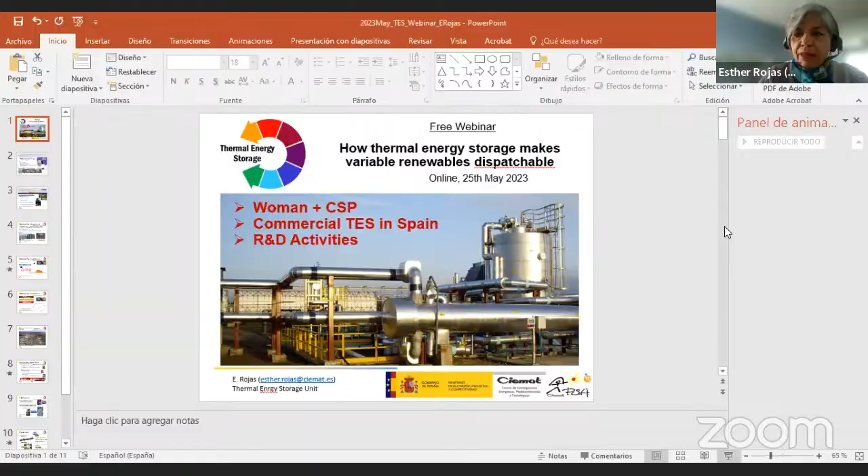here we are. So as Cristina has introduced me previously, I'm going to talk a little bit about what Women Plus Concentrating Solar Power is, and a very brief overview of what the technology at the commercial level on thermal energy storage systems is in Spain, and what are the activities involved in terms of research, development, and innovation.

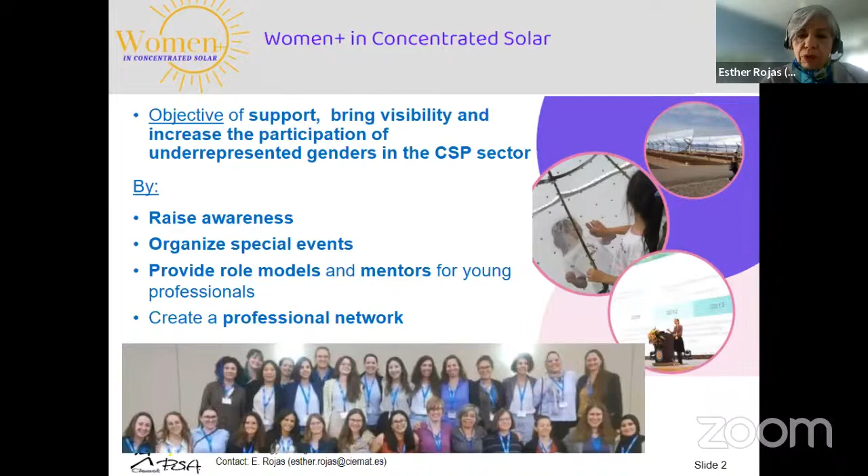Organizing specific events like this one in collaboration with the great support of ATA in this case, and also providing role models and mentors for young professionals. We think that having a reference, a woman reference, sometimes makes things easier for people to be aware of the role that we can play in this technology, and also creating and enlarging our professional network within this sector.

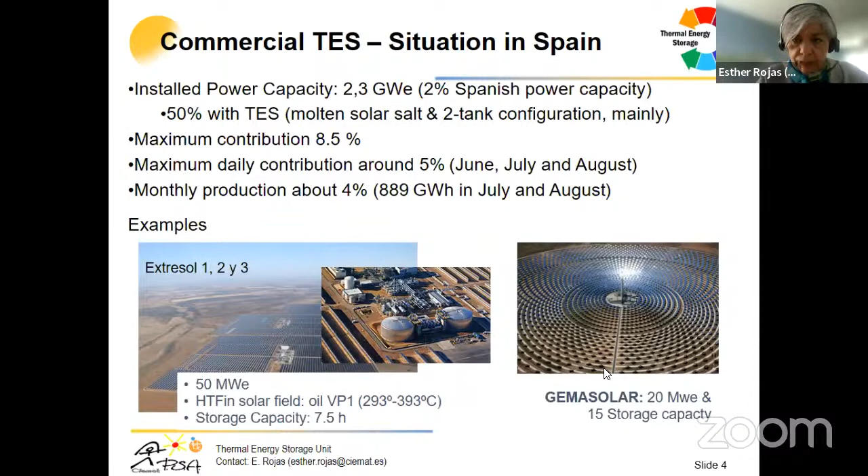And I don't know why it happened, I cannot move on. Sorry, I'm trying to move on, but I can't. It seems the slide is stuck. Yeah. Okay. So now here we are.

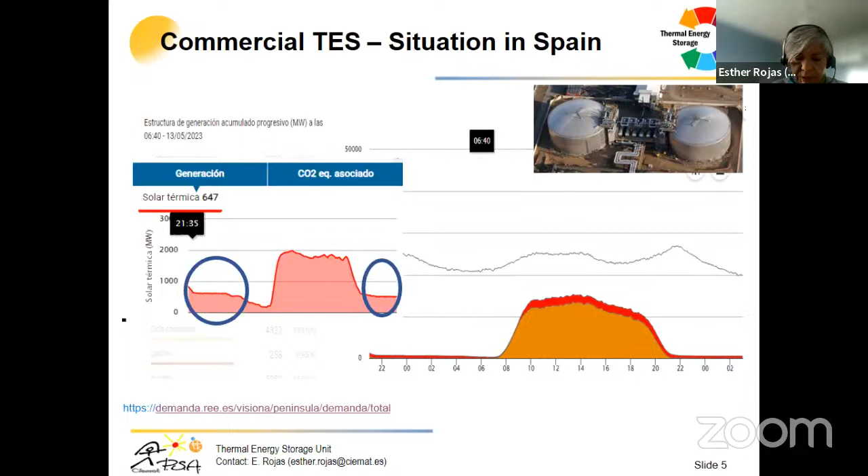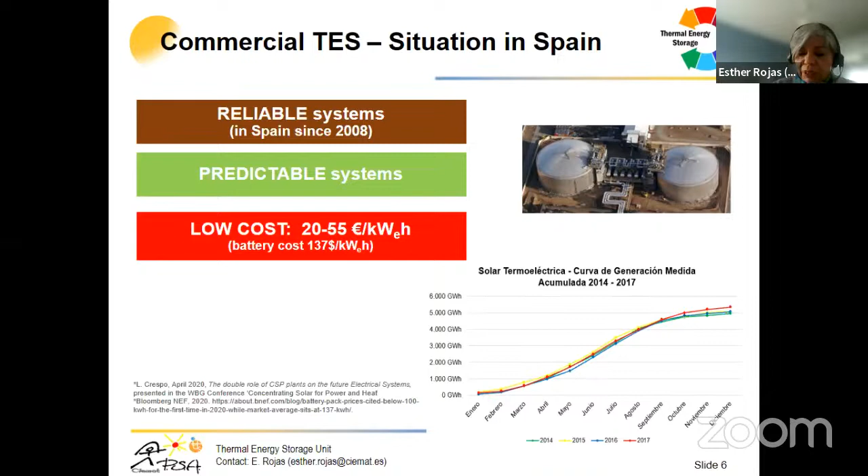This is in relation to the commercial systems that are quite well developed, not only in Spain. We will see more cases and more things in other countries. What I'm doing in relation to thermal storage systems: I have to say, Cristina introduced it a little bit before, that I work for the Plataforma Solar de Almería, which is very well known in the concentrating solar technology world, since it's one of the most complete testing installations worldwide for this technology. And it belongs to CIEMAT.

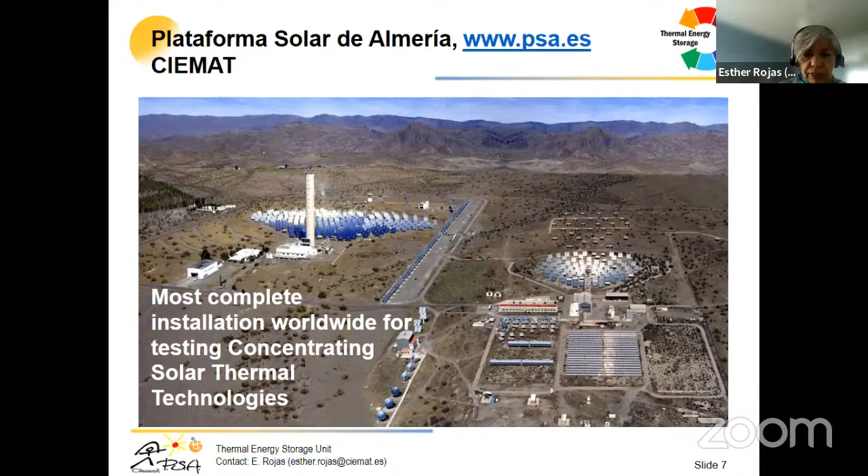And there is a research unit where we have experience in simulating thermal storage systems, and also, sorry, stuck again. And also we work with the evaluation of materials, components, and equipment. So in the end, our experience is in the design optimization of thermal storage systems, where I'm involved in the simulation part, and also in the evaluation and characterization of prototypes and experimental campaigns.

I would like to just briefly go into some details about modeling. I work on developing models for thermoclines and packed beds, with the objective of having predictive numerical models. There are a lot of simulation models, but none of them, as far as I know, are predictive. They always have to be adjusted after the prototype of the system has been erected. And also working on much simpler models, we call them analytical models, able to be integrated in a whole plant model where computing time is important. So they are easy to handle.

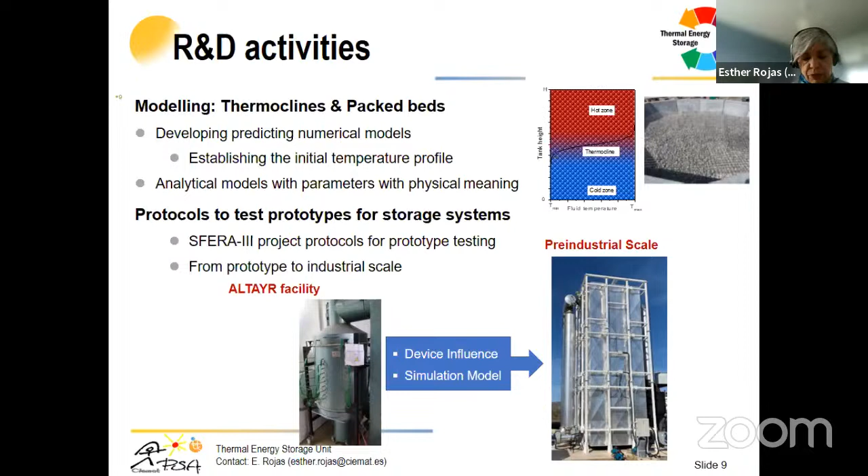As mentioned before, I also work on prototype testing, in the sense of evaluating the experimental results, and trying to optimize the protocols developed in the SFERA-III project for testing prototypes. And also we are quite interested in how we can transfer or extrapolate the results at the prototype level to the industrial scale.

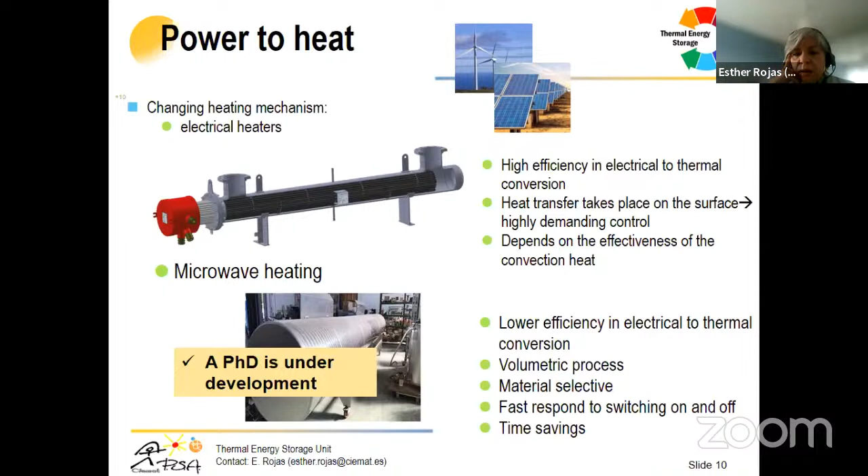Finally, I would like to mention that I'm also involved in power-to-heat-to-power using thermal energy storage systems, a kind of conversion between electrical energy and heat energy. Normally it is made by electrical heaters, and we are exploring the possibility of using microwaves for such heating. I'm co-directing a PhD student on this topic. And that's it. Thank you very much for your attention.

Thank you, Esther, so much for that overview of what's happening right now in Spain, and for giving more visibility to women in CSP. I have a question regarding Women in CSP; we left the website in case anyone wants to check it out. Can only women register, or can men also? No, anybody can be there, of course, be aware of what we are doing and participate and collaborate. So it's not only for women, but if we want to make women or underrepresented genders visible, when organizing things our tendency will be to promote these people. But of course, anybody can be a member of our community.

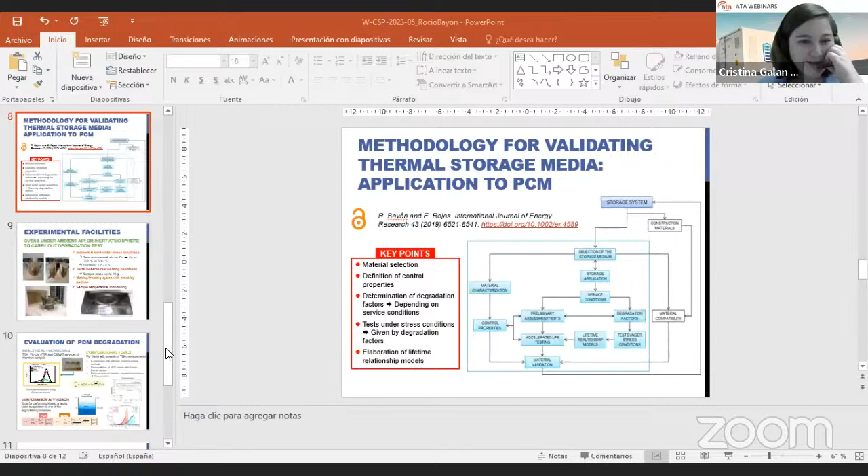Rocío, good morning. I can't see you. Can you hear me? Yes, here I am. There she is. Perfect. So I'm sharing my screen. Can you see my screen? Yes, it's not in presentation mode, but we do see it. I'm going to put it as presentation. Can you see it now? Right now we can, yes. Let's check if it goes ahead. It does.

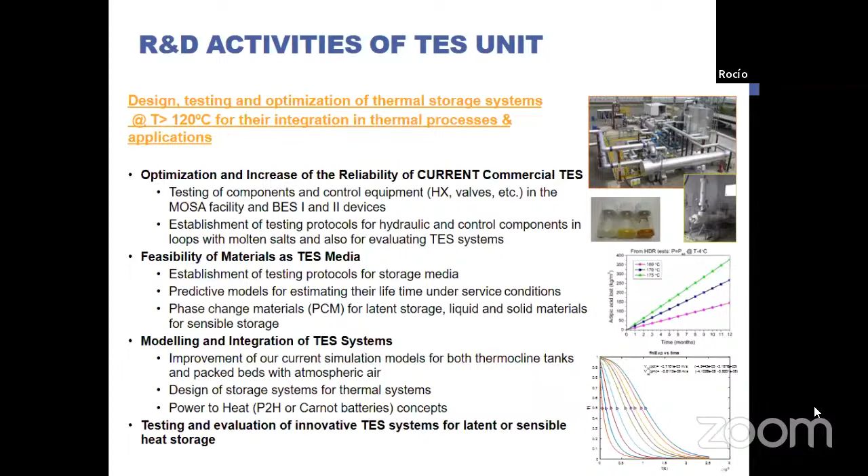And we have another project which is more focused on PCM studies, which is the STIS4D, a national project. And we also recently got two more projects, Infotherm and Mosaico. Infotherm is for calibrating systems for testing thermometric measurements using optical fibers. And Mosaico is another project more devoted to dissemination of the results obtained in the SolarPACES task in relation to components testing for installations of molten salts.

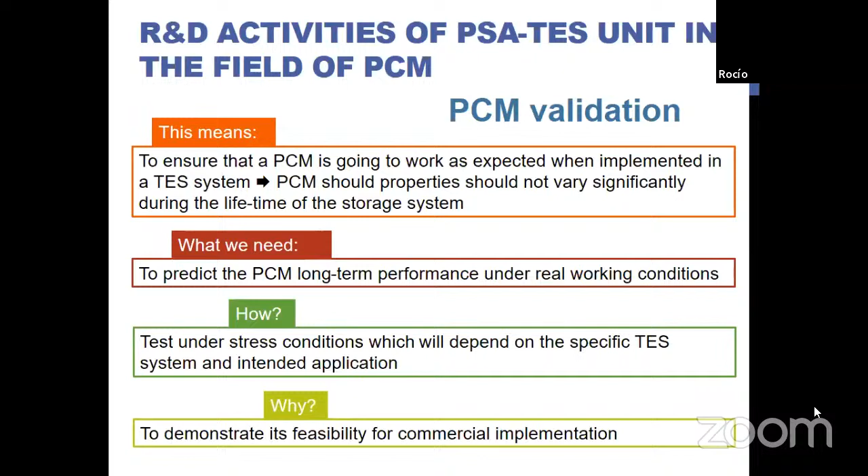And why do we need to do this? Because we want to demonstrate the feasibility of the material for commercial implementation. We have to be sure that the material we are choosing is going to work as we want. So for doing this activity, we already presented or developed a methodology that you can check in this paper, which is open access, if you want to read about it more in depth.

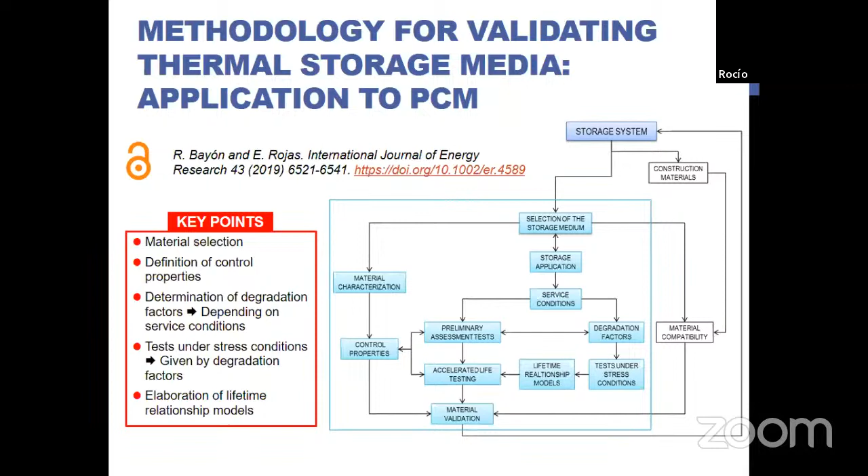I'm not going to explain it here, but the key points are, first of all, we have to determine which degradation factors can affect our PCM material, and this will depend on service conditions. The tests we have to perform under stress conditions will be given by the degradation factors. And in the end, we need to elaborate lifetime models that will help us predict the behavior in the future and the long-term performance.

What we have for doing this in our labs are, for example, ovens that can work in ambient air or inert atmosphere to carry out these degradation tests. So we can perform isothermal tests under stress conditions. It depends on the oven, but we can reach temperatures up to 350 or 500 degrees. The duration of the tests is normally between 1 hour and 6 hours.

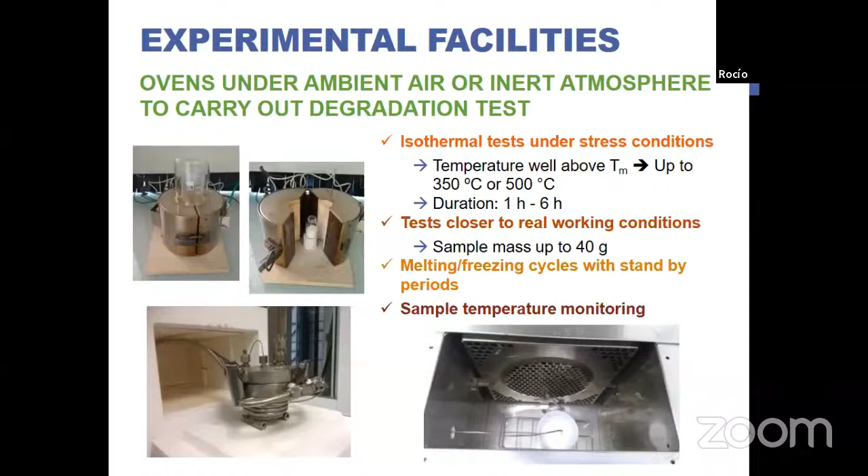The idea is to perform tests as close as possible to real working conditions, which means samples up to 40 grams. Of course, real conditions require much more mass, but for the lab, I think 40 grams is quite okay. In some of these ovens we can also perform melting-freezing cycles with standby periods, and we can also do sample temperature monitoring.

For this evaluation of degradation we can also apply different analytical techniques, for example, thermogravimetric analysis, UV-vis spectroscopy, FTIR spectroscopy. And at CIEMAT in general we have many services for chemical analysis, because if we want to study the degradation of a material, we need to analyze what happens to the material.

We also have computational tools for the kinetic analysis of thermogravimetric measurements. With these tools, we can estimate the kinetic triplet, which is the activation energy, the pre-exponential factor, and the reaction mechanism of this degradation process. We can also do the deconvolution of DTG curves with Fraser-Suzuki curves. You have here a couple of examples of the results we can get.

We have also developed an evaporation approach, because sometimes the degradation process of PCMs is evaporation. So we have developed tools for performing the kinetic analysis when evaporation is one of these degradation processes, either for TGA measurements or for the oven results.

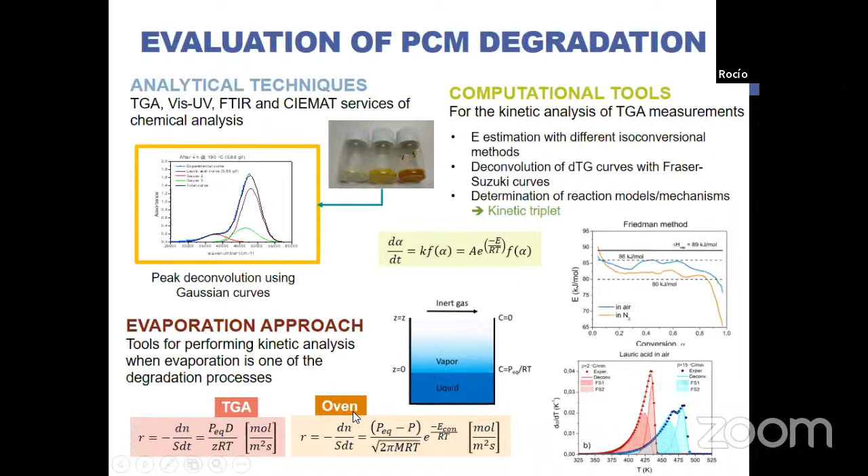Okay. So just to show you, before finishing, some results that we obtained for two different kinds of fatty acids that are normally considered as phase change materials. In the end, what we want to do with all these studies is to predict the mass loss over time due to evaporation, because these acids undergo evaporation when they are in open systems. What is interesting for us is to see what happens at temperatures close to the melting temperature.

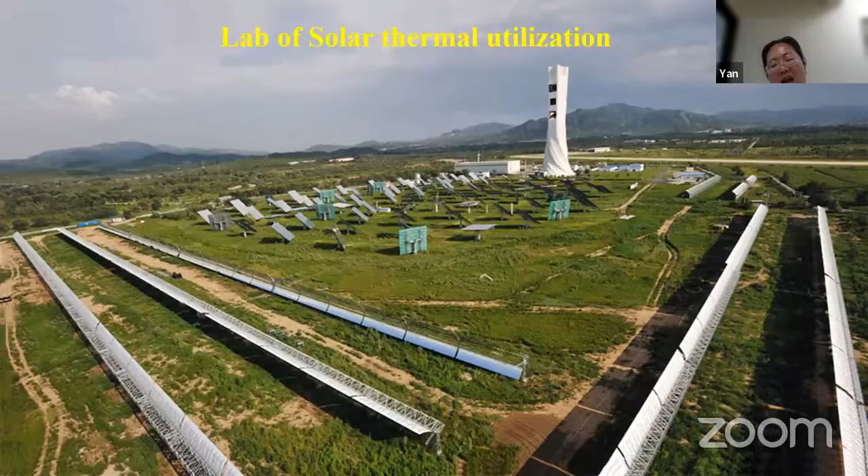During development of the CSP plant, we carried on different kinds of thermal energy storage projects. There are about 4 thermal energy storage projects for high temperature and low temperature, because recently we focused on seasonal thermal storage systems. And I will introduce our projects one by one.

The first is the 10 megawatt thermal energy storage combined with thermal oil and steam. This thermal energy storage system was built in 2012.

Then we built a 1 megawatt solar power tower, and this is the first CSP plant in Asia. In this plant, we built 2-tank thermal oil thermal energy storage, combined with steam thermal energy storage. This is our first thermal energy storage system. We gained much experience with this system, and we all learned more about the performance of the thermal energy storage system.

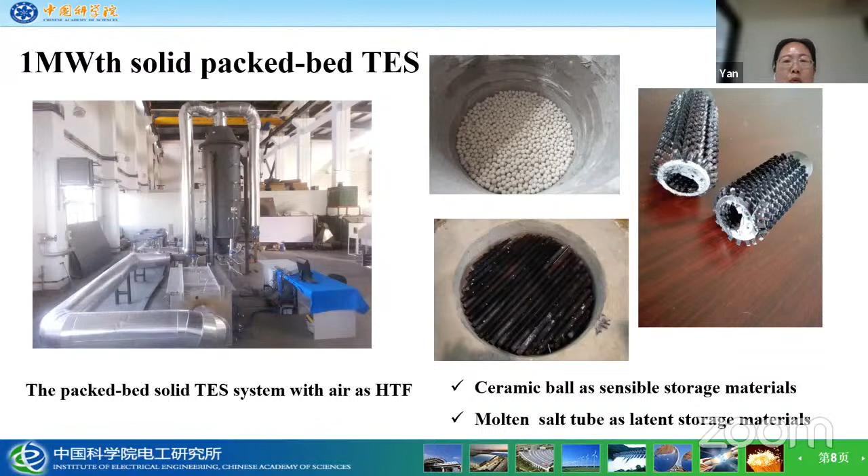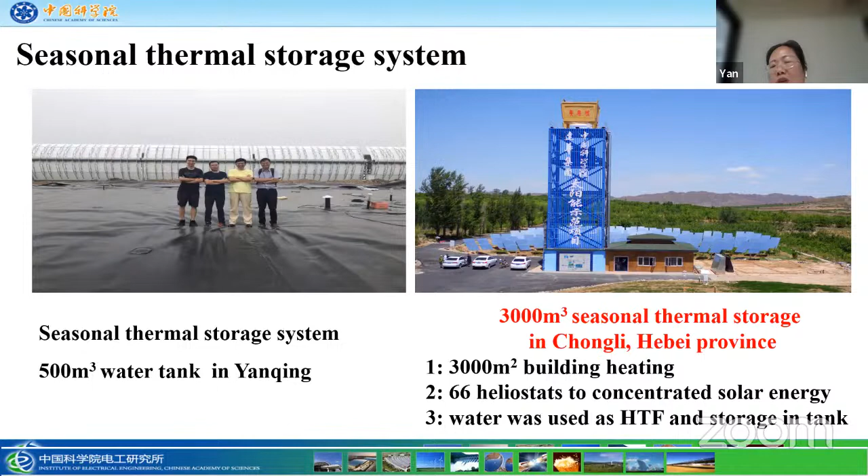And using the 3,000 cubic meter storage tank, we can provide heat for 3,000 square meters of building heating. And during 2 years of working, the performance is very good.

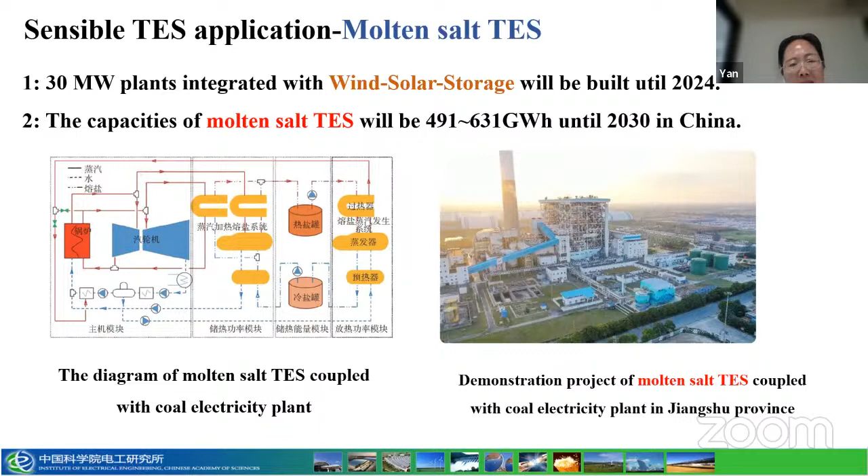And in order to couple with coal electricity plants, molten salt thermal storage has been demonstrated in many provinces. This is the first demonstration project of molten salt thermal storage coupled with a coal electricity plant in Jiangsu province. It uses two molten salt tanks to store the heat, and the heat is provided by electricity or wind power.

And also solid brick thermal energy storage is used very popularly in China. They use magnesia brick to store the heat, because the brick can reach very high temperatures, maybe more than 1,000 degrees. So the off-peak electricity power can be stored into the brick. And when we want to use the heat for heating buildings, we can discharge the heat by air or water.

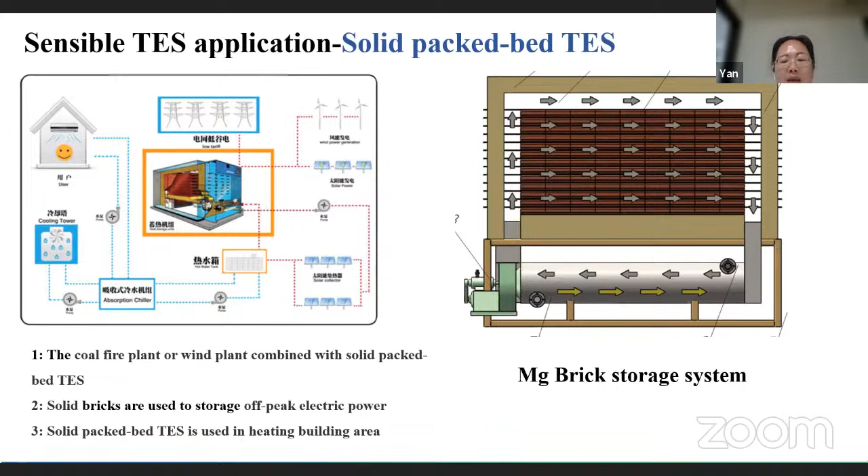Because the efficiency and the temperature are very high in supercritical CO2 CSP plants, solid particle thermal energy storage is developed. In IEE CAS, we built a supercritical CO2 CSP plant, and we use silicon carbide as the thermal energy storage material. This is our system, and we have done many experiments which verified that this thermal energy storage is very useful for these systems.

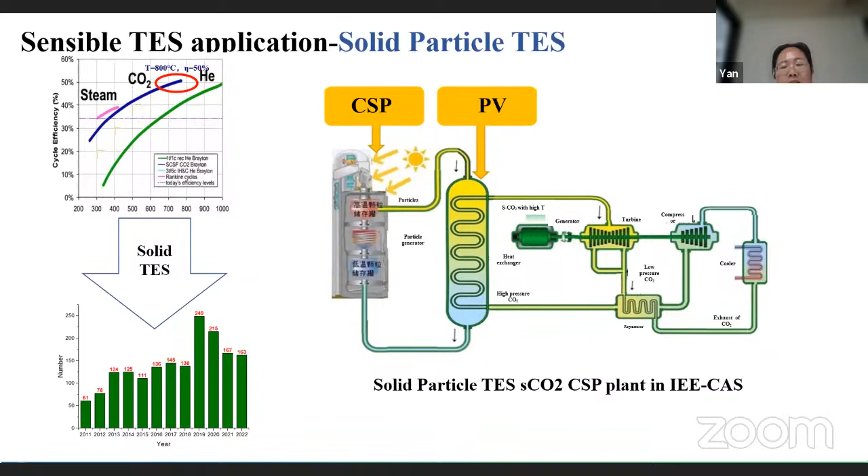About latent thermal energy storage applications, we also did much work. First, because the PCM has very high heat resistance during solidification, our PhD student did some work to investigate the mushy zone performance. From her work, she found that the mushy zone can be visualized and can be controlled. This is very important work for the mushy zone of PCM.

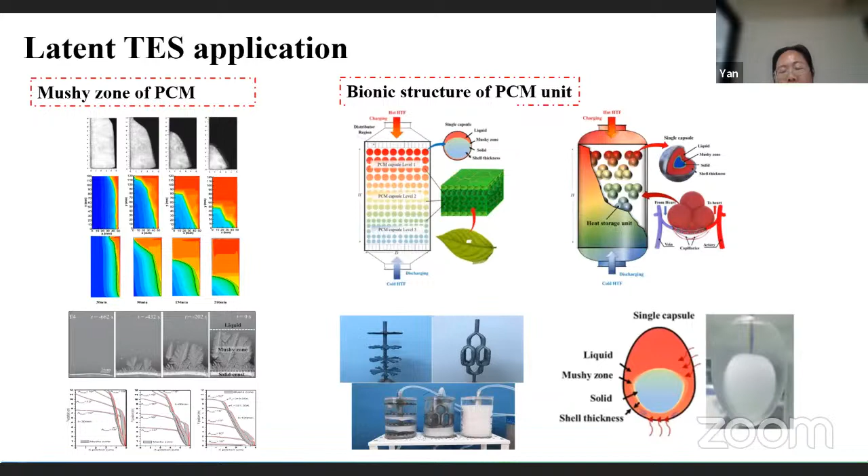And in order to enhance the heat transfer of the PCM unit, a new kind of technology called bionic technology was used in thermal energy storage. Many kinds of bionic structures of PCM units were developed. This is a bionic leaf structure, and also this is a bionic heart structure. This is a bionic lung structure, and this is others. From these experiments, we find the heat exchange performance was increased and can be used for thermal energy storage.

Finally, I want to introduce my recent job, that is integrated solar energy in building materials. In our work, we want to use the concentrated solar energy technology in ceramics and cement. So we do some works. This is our solar cement and ceramics program.

We use the solar furnace to sinter the ceramics; because of the high density of energy, the product is more beautiful than common ceramics, which use electricity or natural gas to sinter. And we also use solar thermal energy to calcine the cement. We want to use solar energy instead of coal, because using solar energy can decouple the CO2

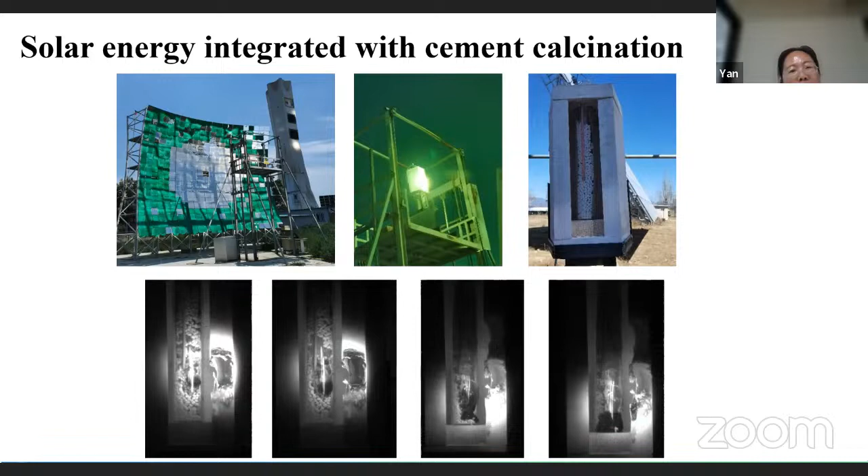emissions. But this work is just the start. It's just carrying on, and not many results yet. We hope we can do this work successfully, and we hope we can cooperate with all of you. Thank you for your attention. If you have any questions, we can discuss.

Thank you. Thank you so much, Yan, for that overview and that research. Fingers crossed that the results are positive. You don't get bored either, as happens in Spain. There's a lot of things you are doing, which is very interesting. Well, thank you so much.

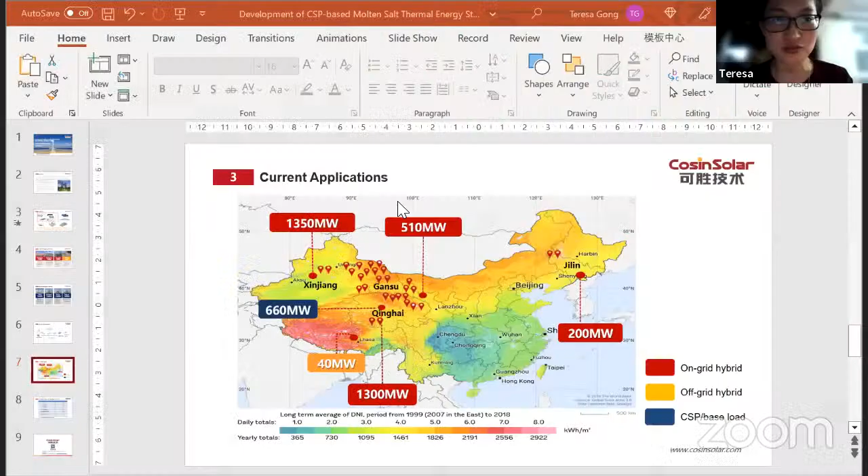Hi, Teresa, can you hear us? You're on mute. Yes, I can. All right. Hi. Can you see? Hi, everybody. Can you see my screen? Yes, we see it. It's not on presentation mode, but we do see it. Okay. Let me see.

In the meantime, just let me introduce that you will be talking about CSP-based molten salt energy storage solutions: the development, how it's working in China, and its impact.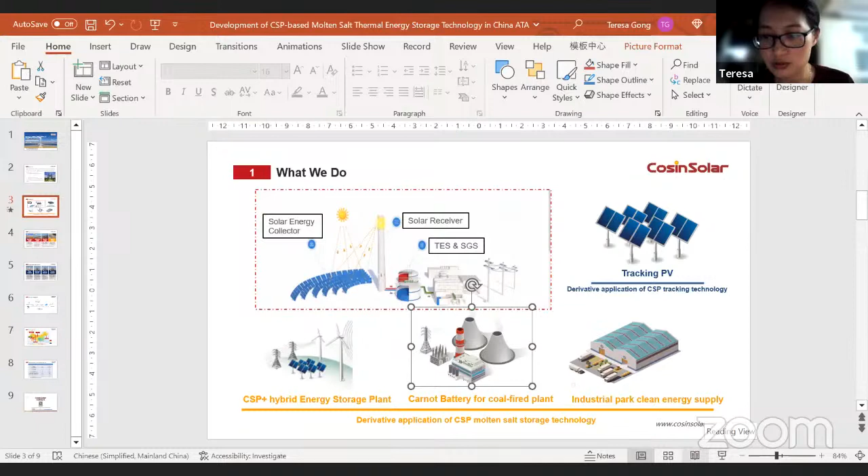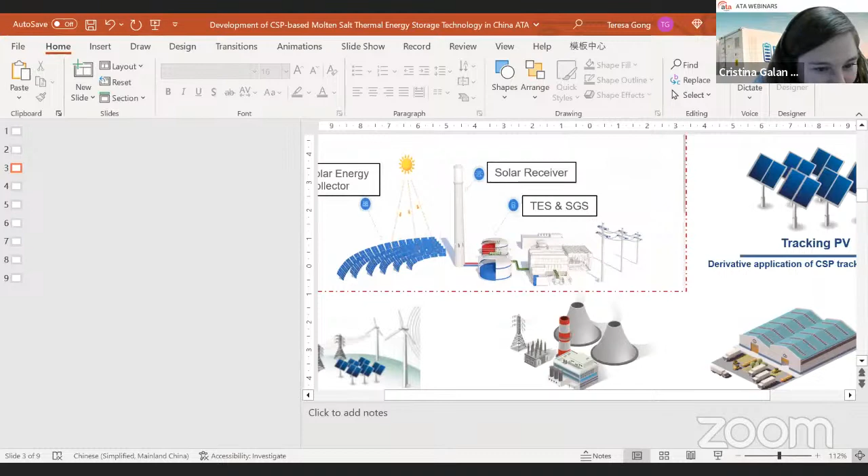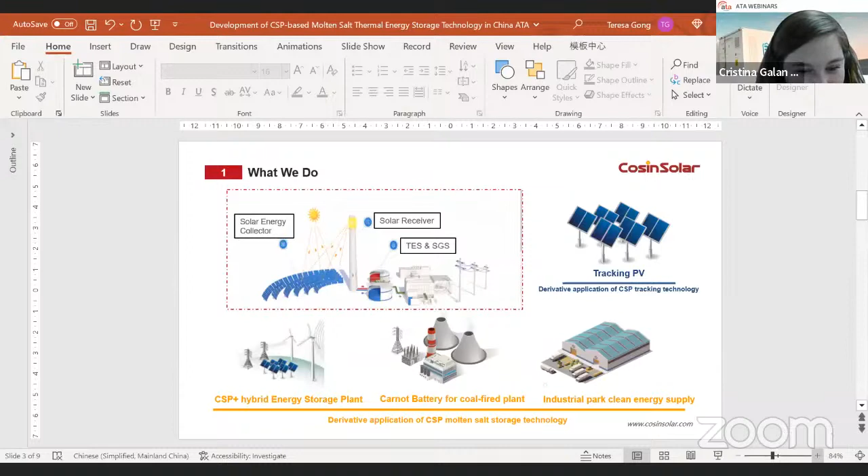Oh, why? I don't know. It seems something is wrong. I think yes. There, you have to use the last icon. It's different from the... Sorry. No, not at all. If you go to the bottom icon on the right, that one. No, a little bit on the left. The one that's like a screen, a projector. There, that one. Oh, okay, yeah. Sorry, I missed it.

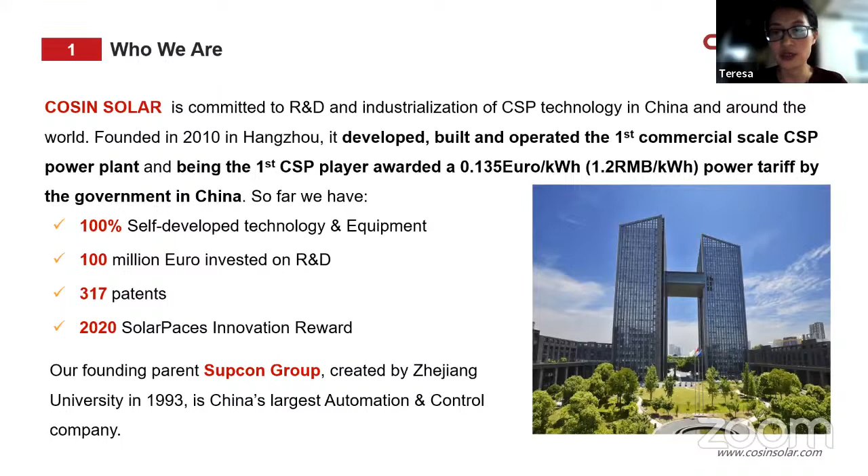So here is a simple drawing of what we do. First of all, of course, the CSP-based power plant; the second major type is the industrialization and application of thermal energy storage; and the last part is PV trackers.

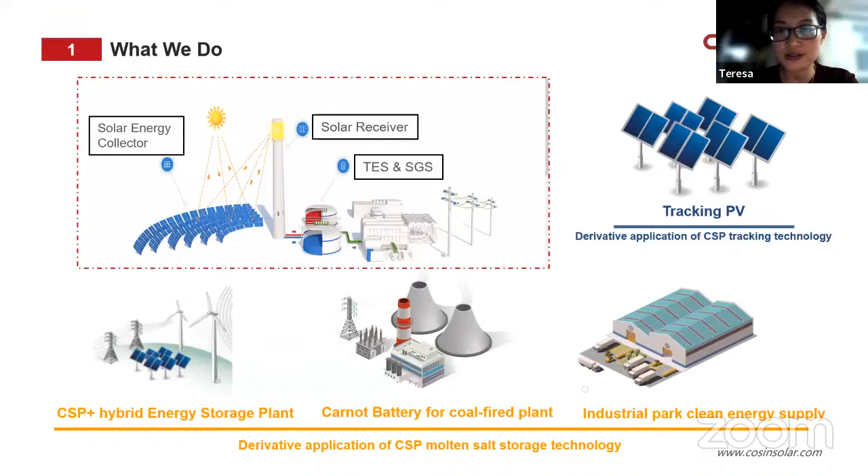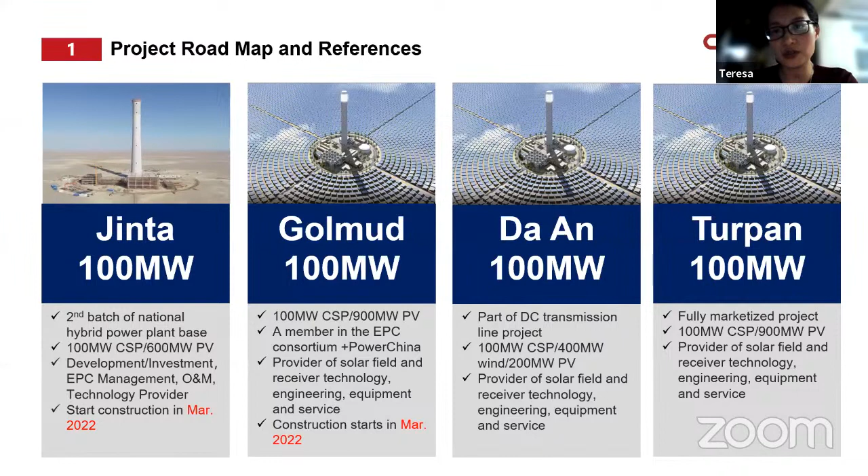And since the second half of last year, we have been awarded a few more CSP projects thanks to the booming CSP market in China. So far we have been awarded 7 projects, in total 750 megawatts, big CSP projects hybrid with PV and wind, which is a kind of application of CSP and thermal energy storage that I'm going to talk about later.

So this is how the technology works. And I know there are many students from all over the world, so maybe this could help you a little bit to understand how this works. So normally

CSP hybrid with wind or PV power park works like this. We build a CSP system with molten salt storage. And on the side to that, we also install electrical heaters, which can basically take in curtailed PV at sometimes zero tariff or even negative tariff, and then store the energy in the tanks and then discharge the energy when there's demand from the grid.

So right now, this kind of CSP-based thermal energy storage has 3 major types of application. So the number one application is what I call on-grid hybrid, meaning that the CSP will hybrid with wind or PV and together form a kind of industrial park, and then dispatch a more stable power curve to the grid.

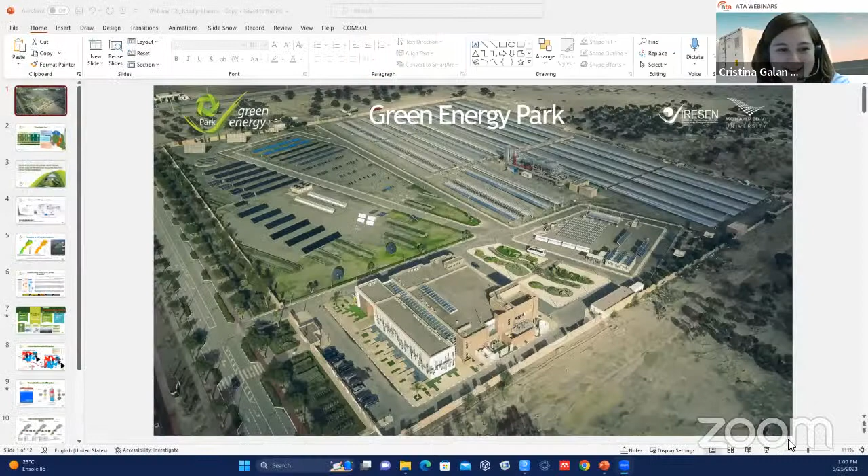In the meantime, let me give a little introduction: you're going to talk about the commercial implementation of thermal energy storage in Morocco and the new possibilities with advances of packed bed thermal energy storage systems using Moroccan rocks as storage materials. Very interesting. We're excited to hear more.

Yeah, thank you, Cristina. So, hello, everyone. I will just present our company to those who don't know the Green Energy Park, which is a platform for research, training, and testing in renewable energy located in Ben Guerir, Morocco. So, in our platform, we have 3 main strategic visions. The first one is the

applied research and innovation for the creation and transfer of know-how, as well as the development and validation of new and more adapted technology within the 3 main departments: electrical and PV system management, solar thermal department, modeling, and the green building department. The second one is applied training, so as to create knowledge through practice and research.

The last but not least is business creation, with the purpose of creation of startups, valorization, and commercialization of our developed prototypes. I'm a part of the solar thermal department, and I'm in charge of the study and modeling of the TES systems, thermal energy storage systems.

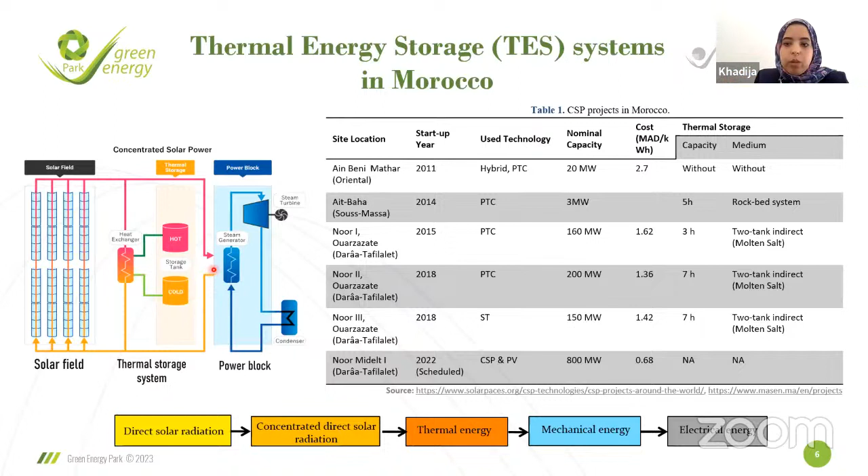So at this stage, the research community is reflecting on how to reduce the cost while ensuring the good performance of the CSP plants. So this can be achieved by investigating and improving the performance of the storage system through the identification as well as the development of other alternative potential storage, along with the other components like the solar field, the heat transfer fluid, and the power block.

So within the solar thermal department here at the Green Energy Park, we are working on this perspective in several research projects, mainly related to solar mirror cleaning, hybrid cooling for CSP and thermal power plants, CSP hybridization with biomass, solid particles as heat transfer fluid, and more particularly thermal energy storage for CSP plants.

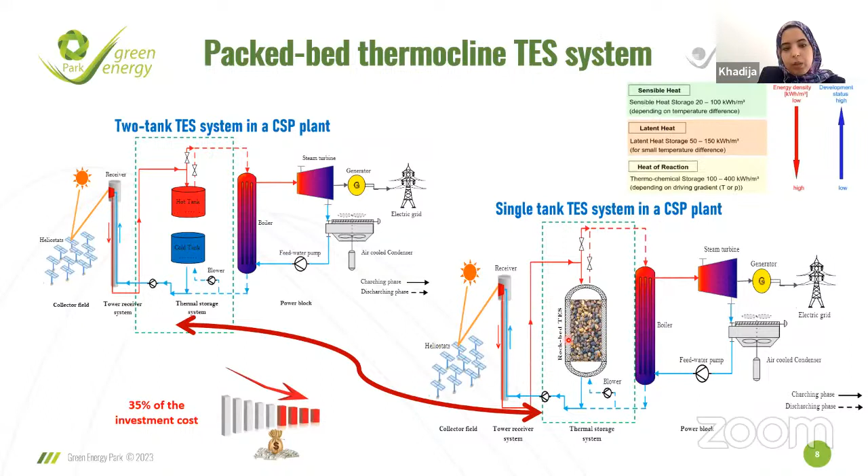Yes, and we are working on replacing the two-tank storage option with another passive option called the dual media thermocline storage system, which can reduce the investment cost by 35% and maintain the good performance of the CSP plants. So this system is a single tank composed of a random or ordered stack of individual solid particles like alumina, natural rocks, and steel slag. And through the void spaces of this porous media packed bed, a heat transfer fluid like molten salts, synthetic oil, or air can be flowed to charge and discharge heat energy within or from the packed bed.

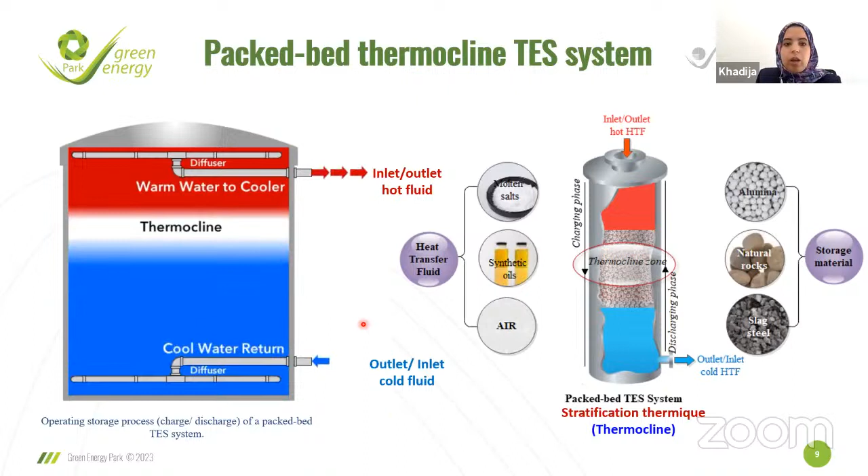In fact, the hot and the cold zones here coexist in the same volume without physical separation. So in this configuration, the heat exchange between the solid and the fluid inside the storage tank is based on thermal stratification. So the main challenge here is how to find the most potential combinations of materials and HTF with high storage performance in order to fill our pilot scale thermal energy storage systems in various research and development projects.

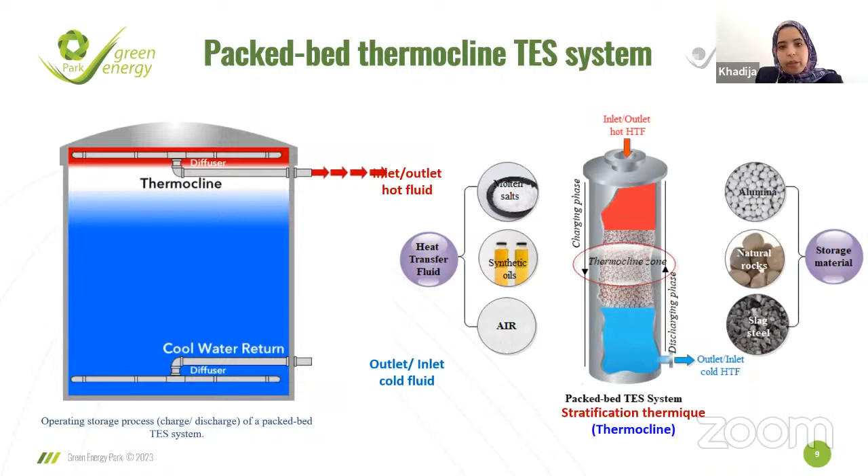So we have different projects. One is related to sensible heat storage, and the other is related to latent heat and thermochemical storage as well, and solid particles as heat transfer fluid. But in this presentation, I will focus on natural rocks as storage materials and their application in packed bed storage systems.

We are actually studying waste heat and the Moroccan rocks as storage materials. Since Morocco has a strong geological heritage, which is composed of several types of natural rocks, magmatic, metamorphic, and sedimentary rock, we can exploit them for the storage applications.

So in our institute, in our research study, we identified and classified several candidate storage materials, and then we go through the experimental characterizations regarding the most required thermophysical properties related to the storage technology. And then we go through the durability and compatibility assessment to select the most suitable rock-HTF combinations, which have the high storage performance.

And then we go through the modeling, with which we can simulate the behavior of the thermal energy storage and predict its behavior regarding several materials. And then we have selected the most potential one, and we can also enhance the performance of the design of the storage systems.

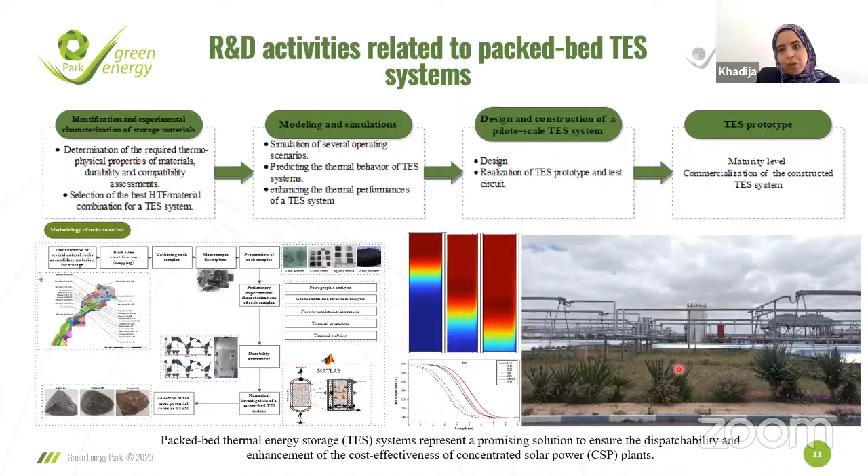So to conclude, thermal energy storage is a promising technology to regulate the gap between generation and demand of renewable energy. And we are expecting to make the packed bed thermocline storage systems a mature technology soon, like molten salt storage systems. So this is my brief presentation.